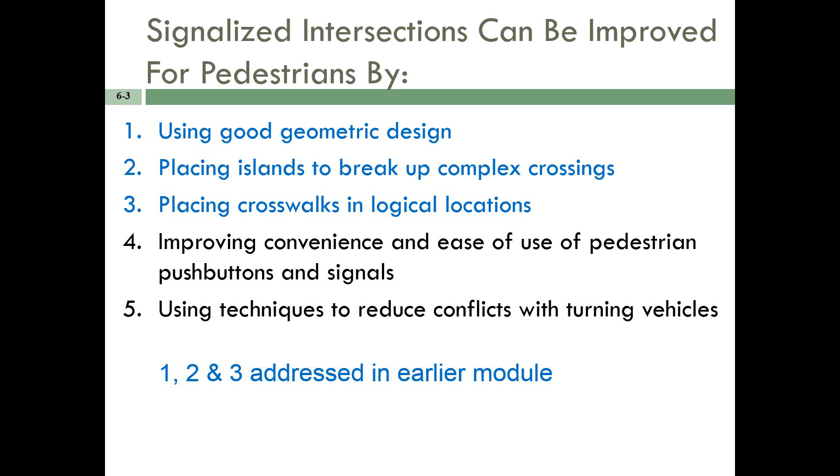And then we're also going to talk about proper push button location, and a little bit about when you automatically get the walk signal versus when you have to push the button to get it, and then also looking at ways to reduce conflicts with turning vehicles. But the first couple of these are things that we're not going to talk too much about today, but may have been discussed in other local agency Traffic Safety Academy webinars, or certainly in various Federal Highway webinars.

The first point that we're making here is that traffic signals assign the right of way. They regulate flow of traffic. And one thing that's interesting about this, and we would like our signal timing engineers to think more about, is that they create gaps in traffic, not just at the signalized intersection, but downstream of them. And so the way that we time and operate our traffic signals has an influence on safety at the traffic signal and on safety adjacent to the traffic signal.

And I'm not saying pedestrian safety, I'm saying overall traffic safety, because of course, while you have pedestrians trying to cross the street, you also have motor vehicle traffic that's maybe making left turns out of side streets or driveways, or doing other maneuvers like that. And so one of the things that we know is that a dense grid of signals that is operating, and let me define some terms. This is more of a professional audience, but let me define some terms that we're going to use throughout.

We have cycle length, which is the total time it takes for a signal to go through all of the phases. And then we also have phasing, which talks about the order in which the signal operates and what sort of arrows you get, left turn, right turn. And Anthony, my traffic engineer friend, is squinting as I explain these in layman's terms. And then we have the timing of the signal, the splits, how much time is given to each of the conflicting movements. So we're going to be using some of these terms throughout.

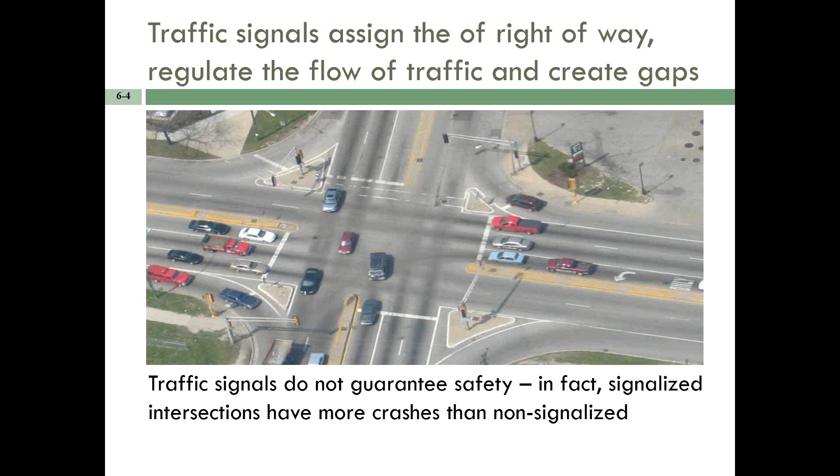We don't get into that too much in the slide, but I think that we need to think of traffic signals not as a point feature that only influences the signalized intersection, but as a systems feature that influences the way the entire arterial grid behaves. So with that, I'm going to move along.

Assuming, which is a big assumption, that everyone is obeying the traffic signals, so the pedestrians are only walking during the walk phase and motorists are not running the red light, or they're not making imprudent right turns on red. When we assume this, which is not really a safe assumption, the biggest conflicts are the turning movements.

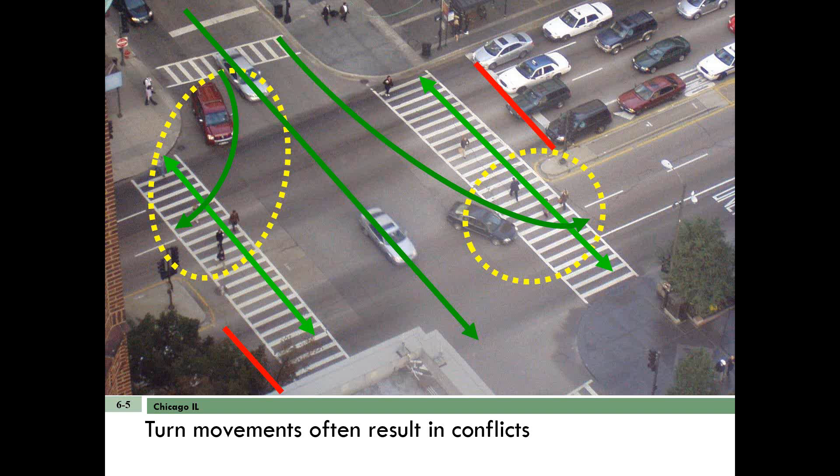And basically you have right turns and left turns. Of these two, the left turn movement is more deadly, more dangerous, results in higher severity of crashes. And that's simply a function of the left turn movement typically being a higher speed movement. It's a larger radius than the right turn movement, and frequently it's a function of a car trying to turn left and get out of the way of oncoming traffic, which makes them tend to want to go fast from a self-preservation standpoint.

Traffic signals don't ensure protection, and pedestrians pretty routinely ignore traffic signals. And sometimes, I'm not saying it's okay, but sometimes they can do it safely. Our office is in downtown Tampa. You can walk around downtown, and certain streets, you better make sure you've got the walk signal. But the lower speed, lower volume streets, oftentimes there's no cars for days in either direction, and you could scoot across as long as you're paying attention and probably be perfectly safe.

And so this is an issue that we deal with, and it's kind of tough sometimes for people to figure out when it's probably reasonably safe to ignore the traffic signal and when it's really probably a very dangerous thing to do. The other thing is that pedestrians are going to cross where it's convenient. Pedestrians and cyclists as well, but especially pedestrians' aversion to out-of-direction travel is very significant simply because they don't move very fast. That's the main reason. It takes a pedestrian a long time to go a couple hundred feet out of the way.

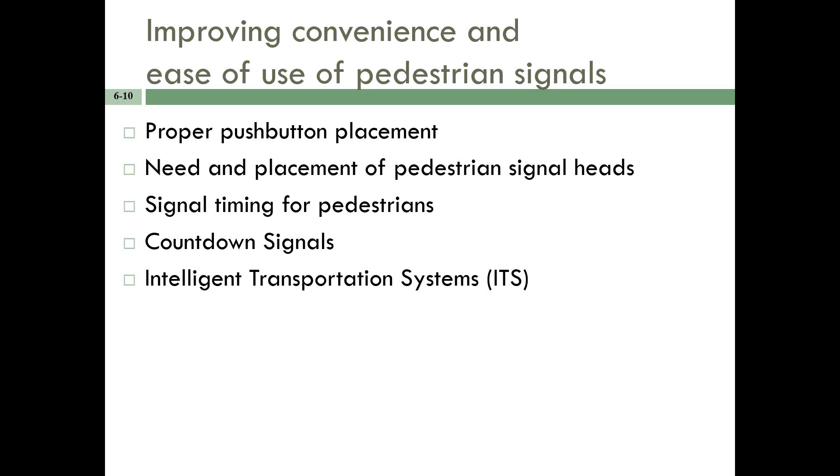So I mentioned before making the convenient thing the safe thing. So how do we make operating the traffic signal convenient? These are some things we can do: good push button placement, making that intuitive, thinking about placement of signal heads so that it's obvious what's going on, timing, countdown signals, and then opportunities to use technology to make the whole thing work a little bit better.

I would say that unless the signal has been built or rebuilt in the last maybe 7, 8, or 10 years, and in some cases even then, odds are that the push buttons are probably not compliant with MUTCD. And a lot of what the MUTCD is queuing off of is really the ADA.

But the idea is that they're in line with the crosswalk so that as you're walking towards the crosswalk, you could basically reach out and tap the button. They should be at least 10 feet apart. A lot of times we see them where they're both mounted on a signal pole, so that would not be appropriate. They should be between 1.5 and 6 feet from the curb, so not too close or not too far away from the curb. And the face of the button should be parallel to the crosswalk.

So again, physically, the orientation of the push button ought to explain what crosswalk it relates to, so that without signs or any other supplemental instruction, it's intuitive how the thing works.

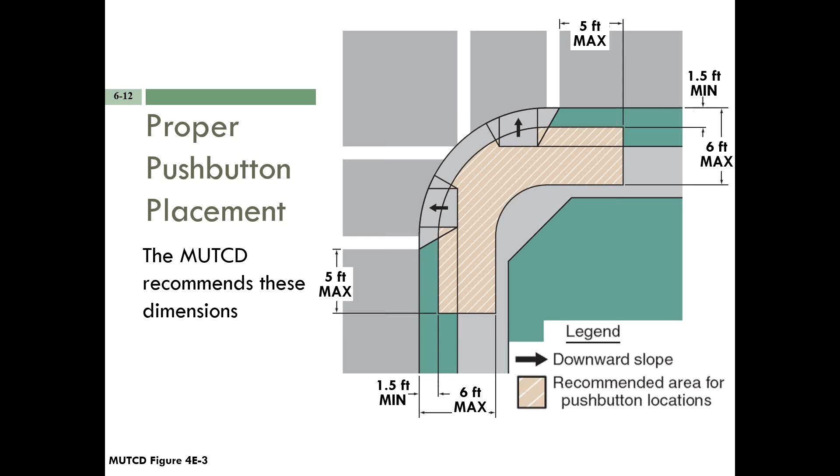And the idea is that place where you push the push button ought to also be the level landing where you wait to cross. And so we're trying to coordinate both the intuitiveness of the button placement and also the ADA requirements. There you go.

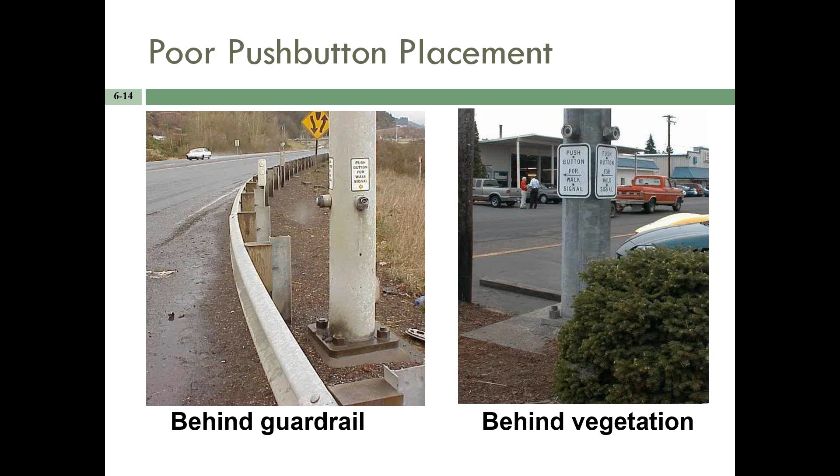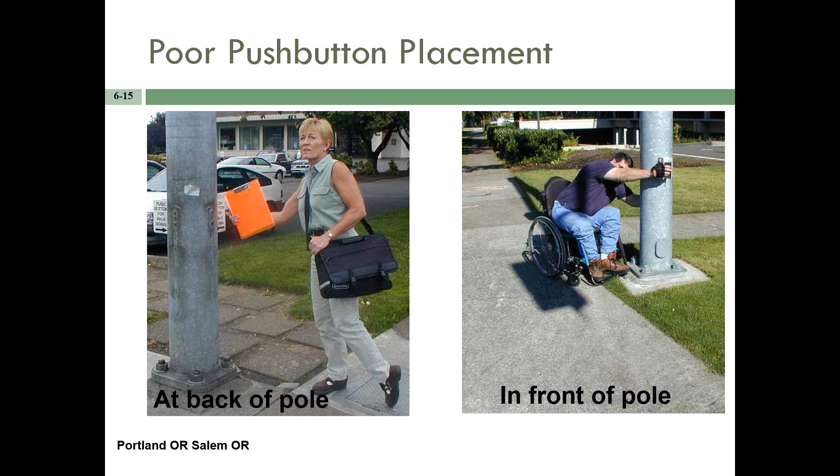When you go and press the crosswalk button, you press it and you pray or you think happy thoughts or whatever your tradition is. When you press the button in an elevator, it lights up and it lets you know, hey, gotcha, on the way. And so that's something that we think is a good adaptation for crosswalks, to at least provide that feedback that lets the pedestrian know, hey, got the message, we're working on it, you're going to get your walk signal.

I've often thought sometimes that people think that pedestrian push buttons are pneumatic because they'll push them about 1,000 times just to make sure, and that probably has a long-term maintenance wear and tear issue. So there may be even some maintenance advantages to providing that feedback, since maybe your push button doesn't get pushed 1,000 times a day. So it's kind of a common sense thing that let's make it work like an elevator.

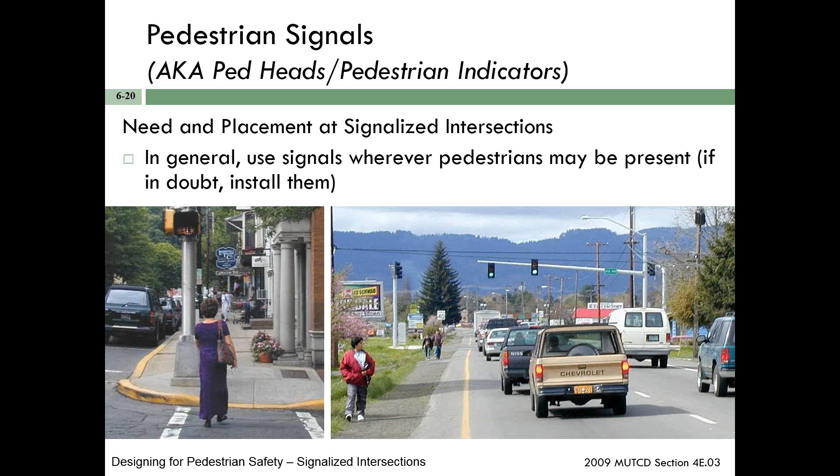So they'll put in the pedestrian signal heads, they'll put in the push buttons, and they'll put in the ADA ramps, just waiting for somebody in the future to show up with a sidewalk, so that at least that basic infrastructure is in there. But that didn't used to be the case, and so there may be some legacy locations that don't have the features. But the preference is that if we have a traffic signal, we have a pedestrian signal head.

Where they don't exist, most pedestrians will figure out to go with the regular signal head and then cross with that concurrent green. But this doesn't always work out. This could be especially a problem on a one-way street where you can't see the signal head. And just some locations where maybe there's left turn phasing or something like that, it may not be the same right of way as for the motor vehicles.

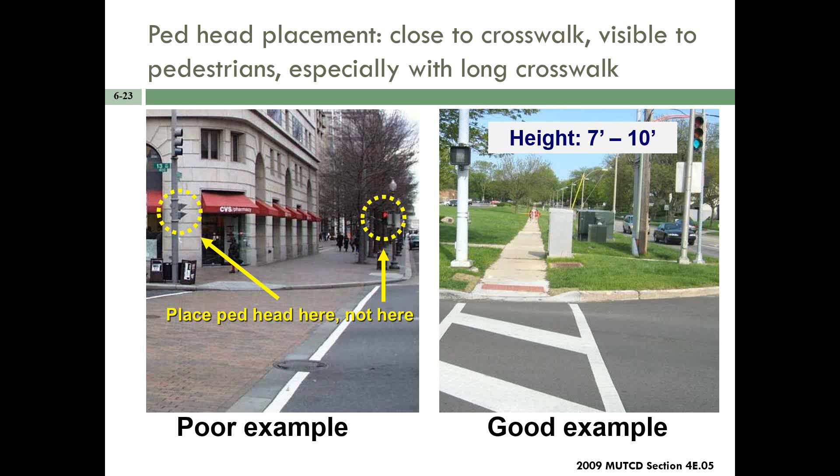Pedestrian signal head placement is important, 7 to 10 feet high, and you really want to place them close to the curb ramp, where they're not so far away, where they're intuitive. And then it's really important that they're more or less in line with the crosswalk. I'm going to make a little bit of fun of the city of Tampa, because I know that a couple of their staff at least are on the field right now and they won't hear me.

But when Zack Street, Avenue of the Arts, was redone, which is a beautiful street, the pedestrian ramps and crosswalks were shifted inward because curb extensions, more commonly bulb outs, were installed as part of that project. By all extents and purposes, that was a wonderful project for pedestrians and a nice downtown streetscaping project. But when those crosswalks were shifted inward, I noticed that the pedestrian signals at some locations were not also shifted.

So you're walking along this wonderful sidewalk, and then you come to the crosswalk, and it's not really obvious to you where the signal head is, and you may believe maybe that it's an unsignalized location and just kind of wander out into it. So this is an example of making sure that they're lined up.

We don't have many or possibly any two-stage pedestrian crossings in the Tampa Bay area. They do exist throughout the country, and frankly, they're a pretty good idea when you have big, complicated intersections. We could probably stand to think about that more, but particularly when you have a two-stage crossing, it's really important that the pedestrian signal heads are offset and aimed, and can even be louvered or using LEDs to make them a little bit directional, so that pedestrians don't cue off the wrong signal head in a two-stage crossing.

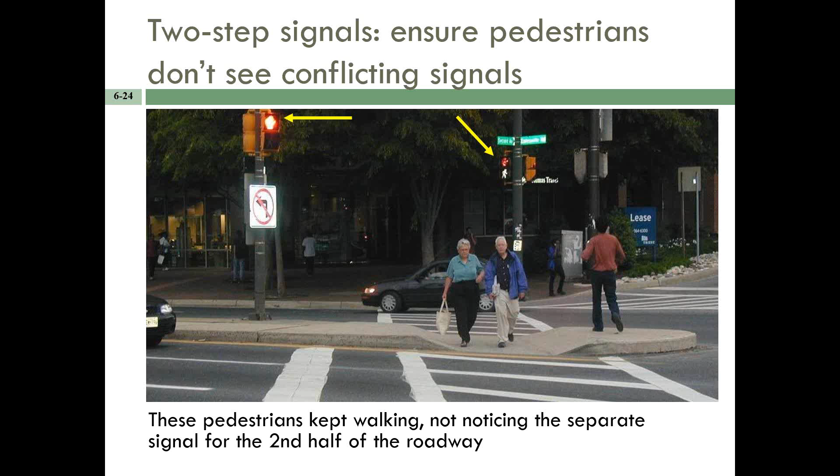Accessible pedestrian signals, something that we primarily think about for pedestrians with visual impairment, but we expect that in the next edition of the MUTCD, these will become the new standard, similar to the way that the countdown pedestrian signals have become the new standard. So as we do new installations or capital maintenance, the requirement will become to either install or retrofit to these.

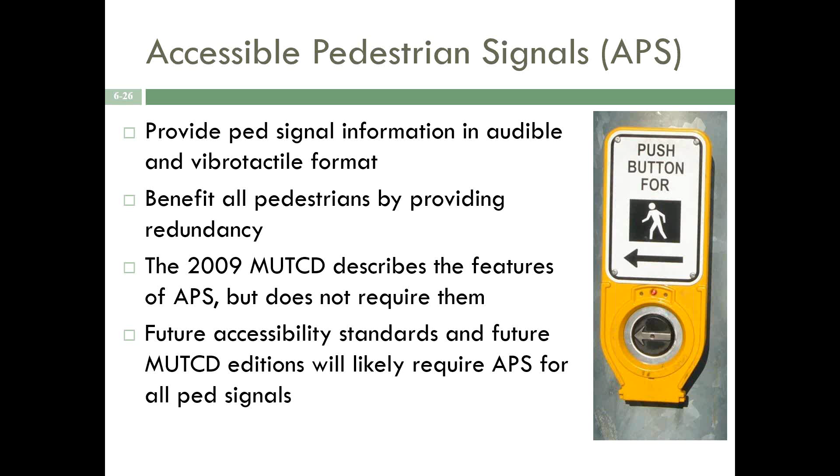What they do is they provide an audible and a vibrotactile message to the pedestrians, and they really do provide some redundancy for all pedestrians, not just pedestrians with visual impairments, and that's why it's going to the overall thing. The speakers are at the push button, and there's two basic components to this. There's a locator tone, which helps someone locate the push button. And that sounds, if you have sound on, a little bit like this. It's kind of a low beep.

The tactile arrow, the raised arrow, explains the direction that the pedestrian push button controls the crossing for. And these things will have an automatic volume adjustment. So think of a noise canceling headphone. They have a microphone that's listening to ambient noise, and then they're adjusting the volume of the locator tone so that it's audible within about 6 to 12 feet of the button.

So someone that's visually impaired will use the guide dog or their normal process with cane or whatever to follow the sidewalk to the intersection. And then from that point forward, the locator tone will help guide them in to the push button. And that's so that it doesn't become a noise pollution factor, maybe for businesses or residents in the vicinity. If you can imagine 24/7 beeping that you can hear from your front porch, that'd be pretty annoying.

But the location, of course, then is critical to the proper functioning. If we've not done the push button location things that we talked about before, then none of this really matters. And so that's why if you have to retrofit to an accessible pedestrian signal, but your pedestrian push buttons are not accessible, or they're in a poor location to begin with, now you're not sending somebody out to swap out a little box and a button. You're going to do a much bigger project.

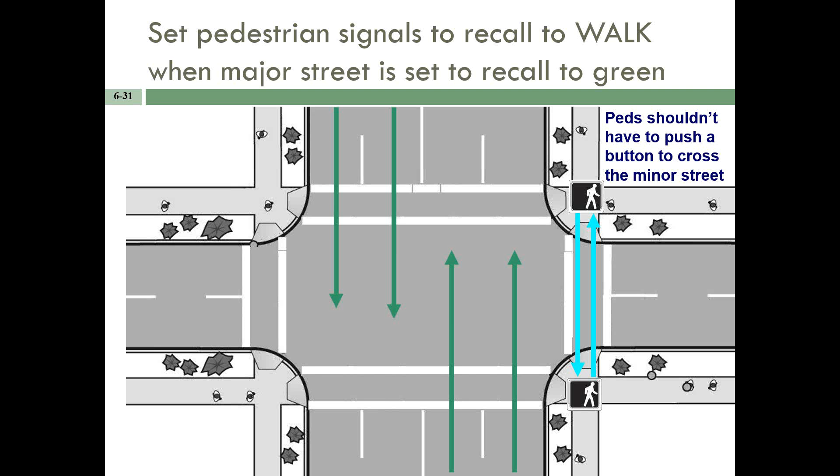The other thing we could talk about also is how our signals operate peak versus off-peak time period. So there may be a very, very valid case where you don't want to call the walk signal for the minor street automatically during peak traffic, but maybe late at night, early in the morning, maybe it doesn't matter as much. I'm not saying that's a good idea necessarily, but doing everything always the same way and not being responsive to conditions or time of day doesn't always get us the best outcomes.

Thinking about timing and walking speeds, shorter cycle lengths are better. Unfortunately, I've heard that in some cases, the absurd duration of our 4-minute cycle lengths are being driven by the fact that the minimum pedestrian intervals are so long, particularly when we have those 2 major roads. I don't know if I fully buy that or not. I'll have to go look at some timing plans and see if that's BS or not.

But as a rule, everyone's compliance goes up when there's less wait time. One of the issues we're going to have with long cycle lengths, not so much a problem in most of suburban Florida, but maybe in downtown areas, is that pedestrians tend to pile up when you have a long wait. And so then that can cause crowding. This is a national presentation. I don't see this being too big of an issue in Florida because we have less pedestrian volume, but in a downtown, this may be something to consider.

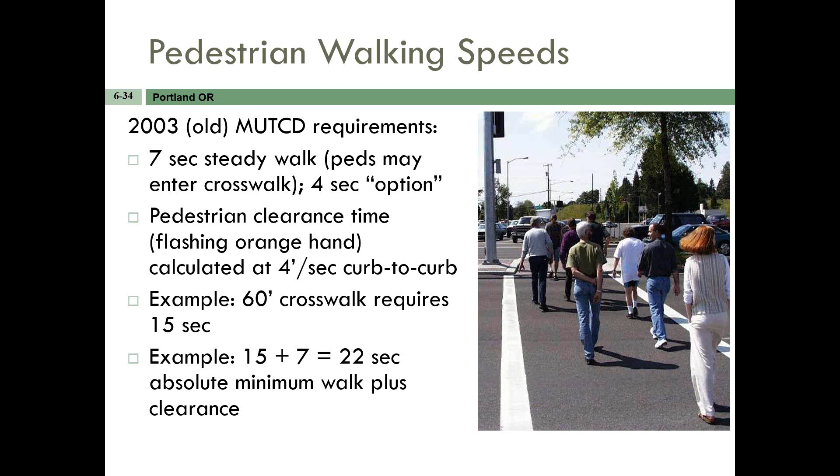Since the 2003 to the 2009 MUTCD, there's been some changes. Let's skip the old requirements because it's been a long time since 2003 and just talk about the new requirements. There's a minimum of a 7-second walk. The pedestrian clearance should now be calculated at 3.5 feet per second, curb to curb.

And so the way this comes out is if the crosswalk is 60 feet, think about it, that's a 4-lane road with a 2-way left turn lane, basically. That's a 60-foot road. So the crosswalk, 60 divided by 3.5, you round up as 17 seconds, plus 7 is a 24-second total. So 7 seconds of walk, and then you'd have a 17-second countdown. But you do an additional test for the walk plus the clearance time, and that's calculated from the push buttons.

So it's 6 feet from the curb if no button to the curb. What does this say? 6 feet from the curb if no button to curb on other side at 3 seconds. Anyway, basically you add 6 feet. And so it's 6 feet plus 60 is 66, divided by 3 is 22, and then you take the greater of the two numbers. And so the alternate test is really maybe more for smaller intersections, basically is what that comes down to. But that's how it's calculated.

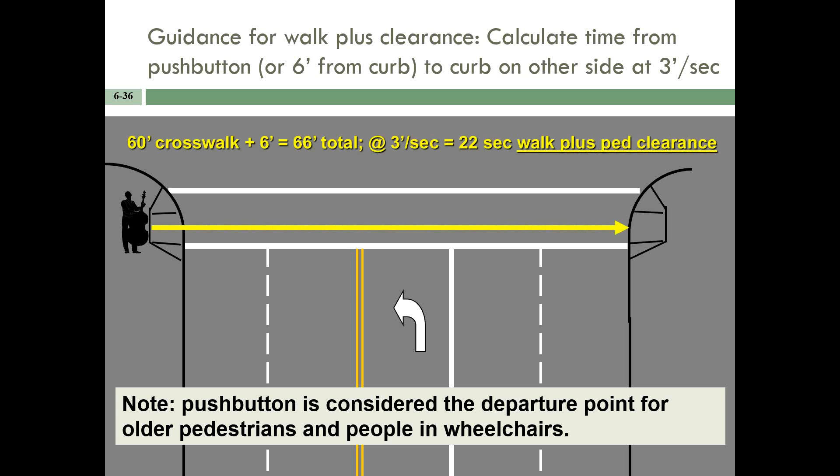And I think the main thing to point out here is that the average American pedestrian has gotten a little bit slower. It used to be 4 feet per second, now it's 3.5 feet per second. Again, mentioning that the push button is considered to be the departure point. And so that's where you get that sort of alternative test. So it's the 6 feet plus to the other curb for your minimum. And usually I think in Florida where our streets tend to be wider, it's going to be the first one, the 7 plus width divided by 3.5.

Used to be we had walk, flashing don't walk, and then a solid don't walk. And most people didn't understand it. I would like to give credit to Florida DOT District 7. Over a decade ago, they were willing to have an unmarked utility truck back up to your local maintenance yard and unload a pallet of countdown pedestrian inserts for local maintenance forces to install. And so I can go down to Fort Lauderdale, where I'm going to be tomorrow, and in their downtown, they won't have countdown pedestrian signals. Although they are aggressively implementing Vision Zero, so I expect that they will have those everywhere very soon. But in Tampa Bay, we've enjoyed the luxury of those for over a decade now.

However, that is a new standard; DOT has adopted that as a standard. So as DOT does maintenance, and really as everyone is doing maintenance, we ought to be updating to these things. The main thing was that the more information you provide to people, the better decisions they can make, and the flashing don't walk simply didn't tell you how much time you had to get across. So with the new system, which was new when these PowerPoints were made but is not new anymore, you know exactly how much time you have.

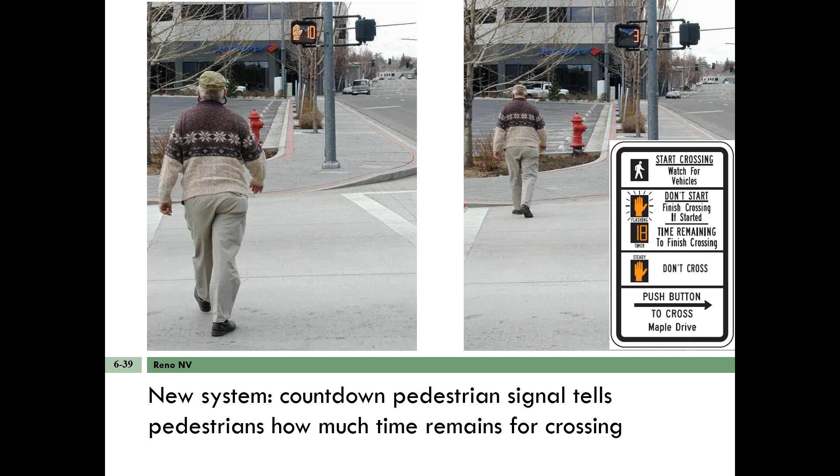Now, if you begin crossing after the countdown starts, technically you could be cited. I've met a lot of different police officers, and I've not really met anyone that's likely to cite you unless you just completely impede traffic as you go across. If you are someone that doesn't move as fast, you know that you need that full countdown period to get across the intersection. If you're willing to kind of run for it at the end, you might be able to look at an intersection like this, have 6 or 7 seconds left, and easily jog across and still make it before you create a conflict. And so providing that feedback is really critical to people making good decisions.

These have been out there, as I said, for over a decade, so we've had time to study them. They're intuitive for pedestrians. What we find is that more people start crossing during the countdown. So, technically more people are breaking the law. But what we care about really is the outcome, and that's that fewer people start walking late in the clearance phase, and very few people are walking when the don't walk has come on, so you're at the yellow and then red for the drivers. And the other thing that we found is that they have an overall crash reduction benefit on the intersection, not just for pedestrians and cyclists, but for motor vehicles. Drivers use these to say, you know what, I'm just not going to make that one. Even from a distance, you may not be able to read the actual numbers, but you can usually tell if it's down to single digits.

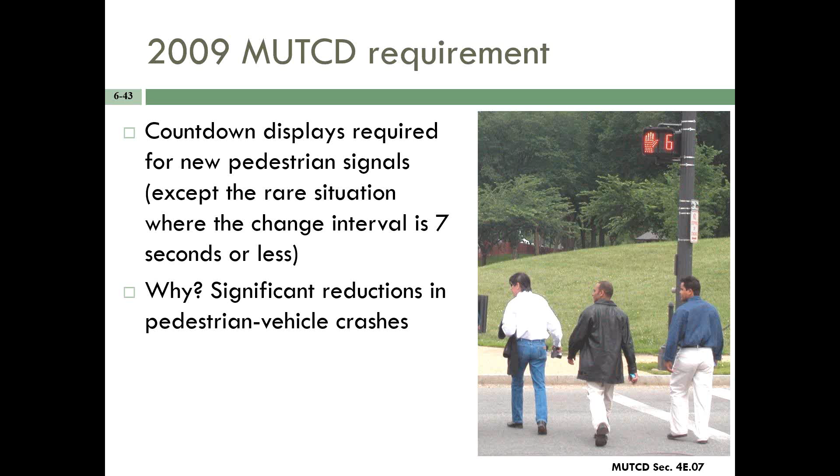So new requirement, overall good benefit. We've had a little discussion here already, and we can bring it back at the end. One of the things we want to talk about is using technology to sort of optimize what we're doing. We use 3.5 feet per second as sort of that.

It's sort of not really the straight mean of pedestrian walking speeds, but kind of that first standard deviation. So we're accommodating maybe 85% of the walking public with that 3.5 foot per second standard for our timing. But then that means that there's maybe 7, 8, 10, 15% that are slower than that. If we take all of our signals and say, well, we've got maybe a little bit older demographic, whatever it is, let's go with 3 feet per second.

Now every cycle length, we're taking that hit. We're extending our overall cycle lengths, which have negative effects I've already talked about. So it's not something you necessarily want to deal with the outliers on every single phase. So what we can do is we can use whether it's video detection or infrared to basically understand that I had a pedestrian call. And again, this is probably going to be something that's more on that minor movement walk interval where we really are sensitive to how much time we're taking away from the arterial.

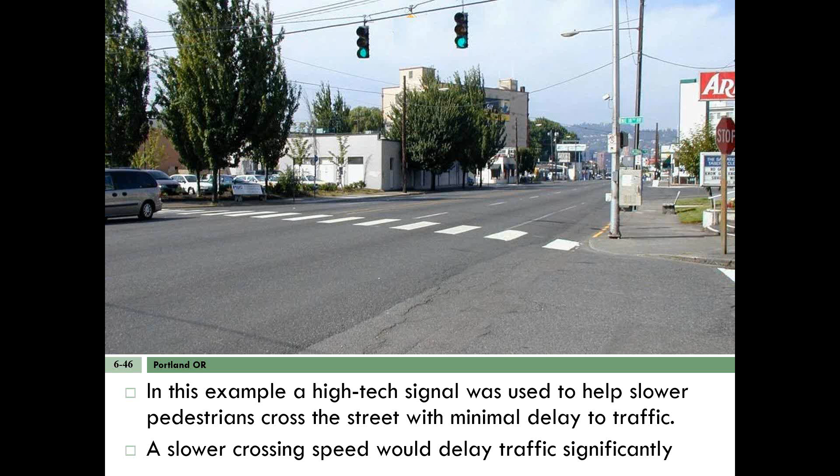So I've got a pedestrian call. I know that somebody's going to want to be trying to cross, and we can use our technology to track that person as they come across the crosswalk. And so the idea here is that they're watching the crosswalk, they're tracking the pedestrian, and they can extend that walk interval a little bit. So you time it to the standard timing, but if you have that outlier pedestrian, that 5-10% of your people coming across, then you can give them more time.

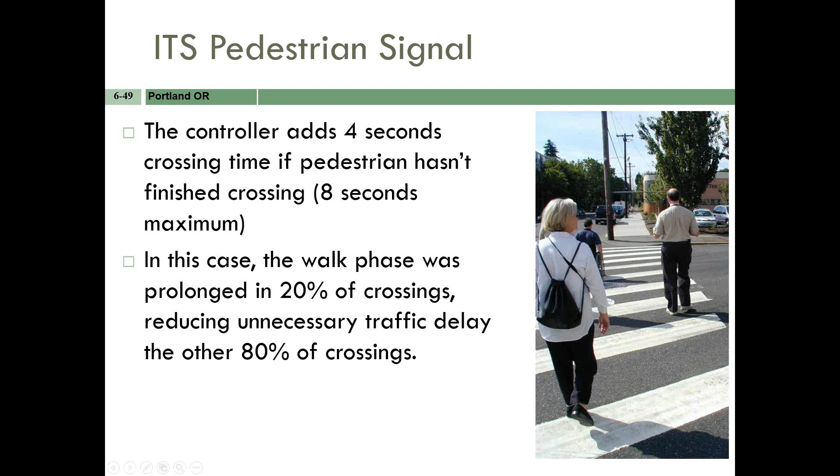Basically, you add a 4-second block. If they haven't finished, then you can maybe do another 4 seconds. And for those of you that deal with signal timing, you can think of it as sort of dilemma zone preemption in reverse. Eventually, it times out. But what we found here is that the walk phase was prolonged. This was a Portland study. About 20% of the time, it needed to give the pedestrians a little bit more time. But there was therefore an 80% reduction in the delay for motor vehicles compared to if you had just always used a longer interval. So that's something to consider.

And again, that may be situational. You can analyze your demographics. Maybe you've got hospitals nearby. I know some locations in Tampa where we've got housing that's specifically for the elderly. It could be different reasons. It's sort of like the no right turn on red, the leading pedestrian interval. It's one of those things that's more of a case-by-case thing that you do, but it definitely has benefits.

Looking at turning movements, nationally what we find is that the left turn is 2 to 1. And I think there may be crashes or incidents with the right turning vehicle, or maybe the pedestrian gets brushed by the car or even knocked down. They're not injured, and I've seen people go around and say only half of motor vehicle crashes have injury, but 95% of pedestrian crashes have injury. Well, no, it's not necessarily true. You just don't report them if you're not hurt.

There's no damage to the car. If the pedestrian's not damaged, it's not a crash as far as we know. It's just two people yelled at each other a little bit, and one of them went home mad and maybe a little bruised. So I'm not necessarily saying it, but maybe right turn conflicts are at least as common as left turn, but they're less likely to result in a reportable crash or less likely to result in an injury.

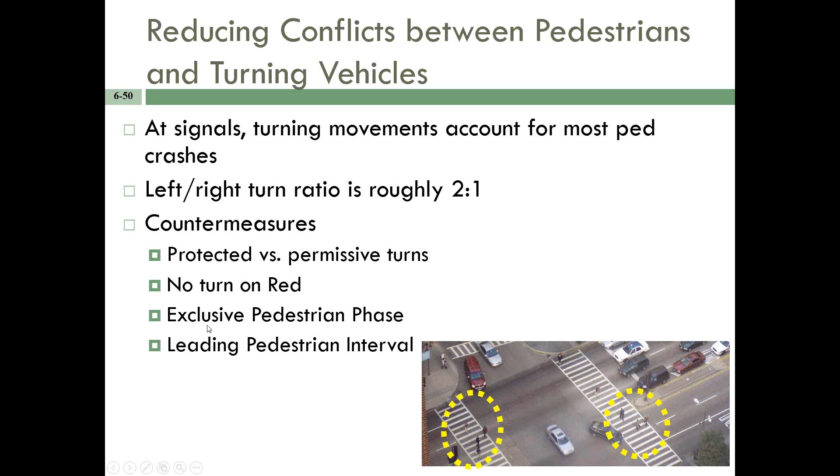There are opportunities where exclusive pedestrian phases make sense, and we'll talk about that a little bit, and then leading pedestrian interval, and we've actually got a couple here in the region. We can talk about that. One thing we've done is at locations where we know that along the corridor we have sort of an elevated crash history, is we'll just remind people of their obligation to yield to pedestrians.

That's the R10-15 sign, and mostly you see these to remind people to yield to pedestrians when they're turning right, but you can also use these in a left turn situation. And again, we've gone more to the pictogram than to all the words. You can use an LED if you're real serious, but that costs a lot more. And these can be mounted on the overhead if it's a newer signal and you feel good about the structure, but more often you see them mounted on a sign pole at the side of the road there.

Protected versus permissive left turn. Protected left turns reduce all crashes, reduce left turning crashes and then also pedestrian crashes. This is what we're talking about, a permissive turn: green, cars go, the pedestrian starts, and then the left turning traffic goes. When we show this little illustration, we show it with the pedestrian crossing from the same direction of the car, because that's more dangerous. If the pedestrian is here and is crossing, odds are that this driver is at least aware that they exist. And as they start their turn, they'll see the pedestrian crossing.

In fact, odds are that by the time they get a gap from traffic, if this pedestrian was going the other way, they may already be through the receiving lanes for a left turn. So really the threat is when it's the same direction. And what we see is that this driver, not because they're a bad person, but simply because they are a human, is concerned about the threat to them. What's like me, what's the same size, what's dangerous to me, and that's motor vehicle traffic approaching from this direction. They are obligated to yield to this pedestrian, but may not even be aware that they exist in the first place because they're fixated on this cone of vision, looking for a gap.

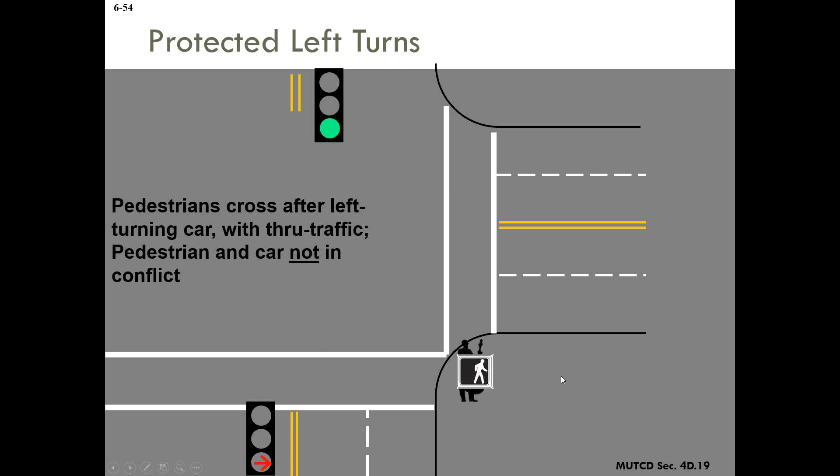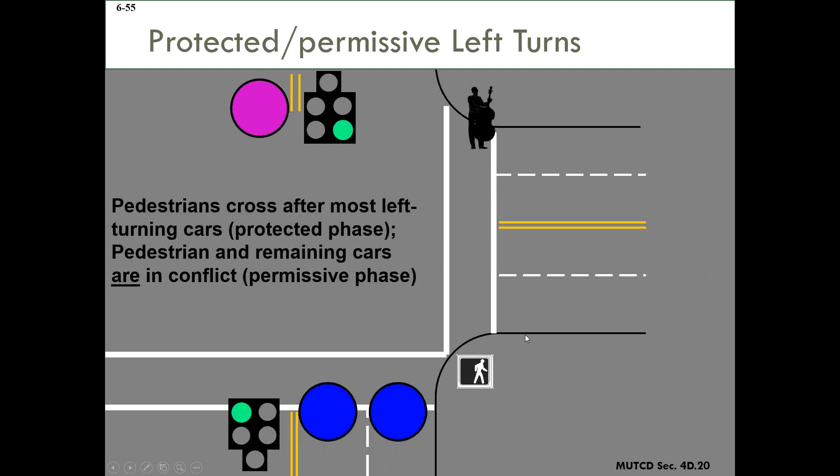The other thing I'll mention is that protected permissive is better for traffic because you let the drivers go through, but really still presents, I'm jumping the gun here with a slide. These guys go, but then you're back to the same old threat as what you have here. A solution we have that we've implemented awkwardly, I guess, or maybe only partially implemented in most of Florida, is the 4-section left turn signal. This has got the flashing yellow arrow, and more and more of these are becoming common.

What's a little frustrating for me is that the design philosophy of these nationally had two elements. One was that some people did research that said that a flashing yellow arrow sends a clearer message that it's a left turn, but you have to yield, than does the green ball from a 5-section signal head. So one part of it was a feeling that a flashing yellow was more intuitive than the 5-section heads that we were all used to. I'm not even sure if I buy that argument, because even if you took a space alien and landed him in and said which one makes more sense, the flashing yellow would make more sense. But then again, we were all used to the other thing.

And so we use them for that. We put them in new signals because it's thought to be a clear message that this is a permissive left turn. You can turn left if you yield. But the other big thing that they're supposed to be for is that they can be conditional. There are intersections where during the middle of the day, during the evening, early morning, late at night, whatever, it's perfectly safe to make a left turn on a permissive movement where oncoming traffic has the green.

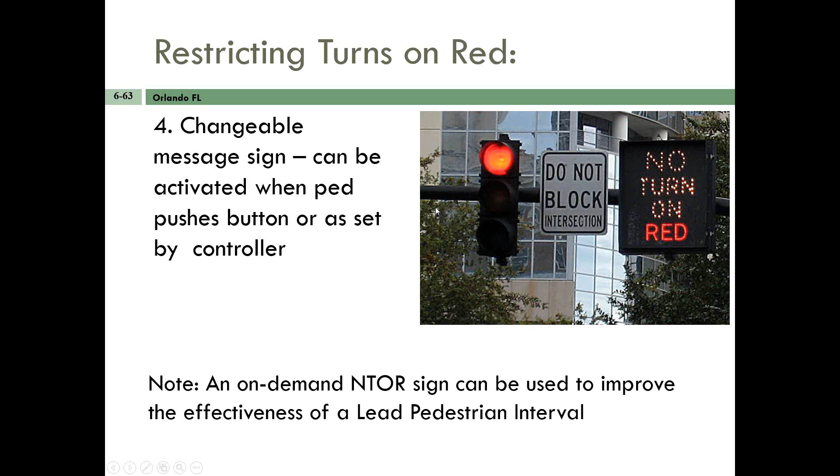They can be by time of day. A real good time of day case is school zones, as an example where you might do that, or it could be when the office is disgorging all of its people to walk across the street to the parking lot, or whatever, conditional. It can be actuated with LED. This is a little bit more expensive, and then you start getting into what's the wind loading on the structure. It may become a pretty expensive project.

We have an exclusive pedestrian phase. This is a pretty unique thing. Typically, you would do this in a downtown area where you have very high pedestrian volumes. And what you're really doing here is you're eliminating all pedestrian vehicle conflicts. So the pedestrians can go east, west, north, south, and also diagonally. No traffic can go, no turns on red. And then you have your movements for your motor vehicles. So there's pros and cons to this.

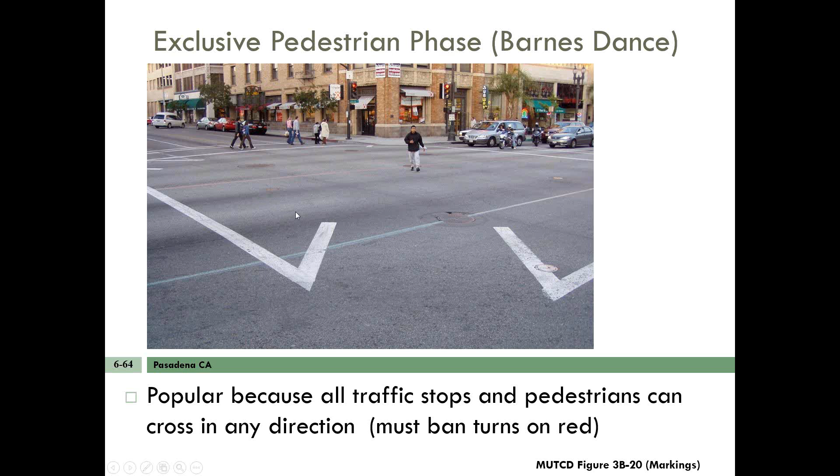This is something you would see when you have serious pedestrian crossing volumes, creating real conflicts and delays with the motor vehicle volume because none of the turning traffic can go because there's always pedestrians in that crosswalk. And so then you just give up and you say, you know what, pedestrians go, cars go, two separate times. Again, most likely to find this in a downtown, maybe a university campus, very, very high volume locations. Pedestrians have to wait for both motor vehicle phases to go, but then again, they can cross diagonally, which can be an advantage.

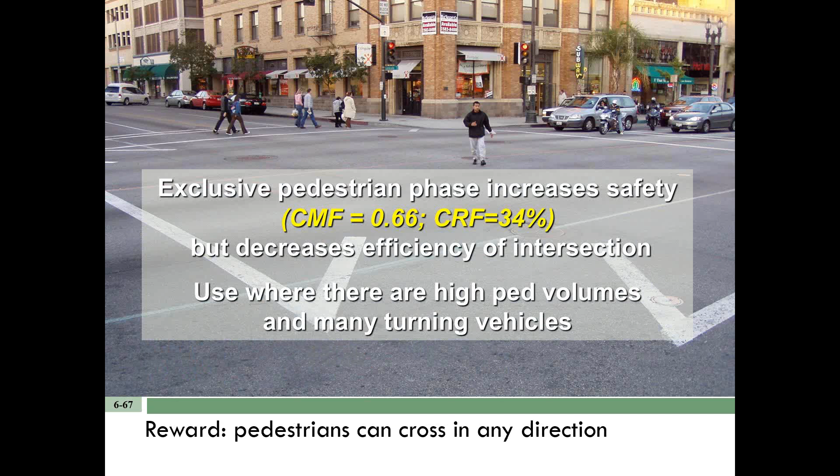We kind of skip through these though. And obviously, when you eliminate all of your turning conflicts, you get a good crash reduction when you do that. Leading pedestrian interval, there may be more. The one I know about is in downtown Tampa on Ashley at Kennedy going across the bridge. These are things typically you find when you have a very, very heavy right turning volume. And what it does is you'll have a condition where you've got right turn on red, and then at that location, it's a two-way street into a one-way street. And so you have a left turn movement; you basically have drivers that are making an eastbound left turn.

And so it's a very, very easy right turn on red movement there because that eastbound left is really a major phase. So the drivers are making right turn on red, they're getting used to it. And then the southbound goes green and the drivers just keep turning right and the pedestrians never get a chance to go. And so this is basically like a miniature exclusive phase for the pedestrians.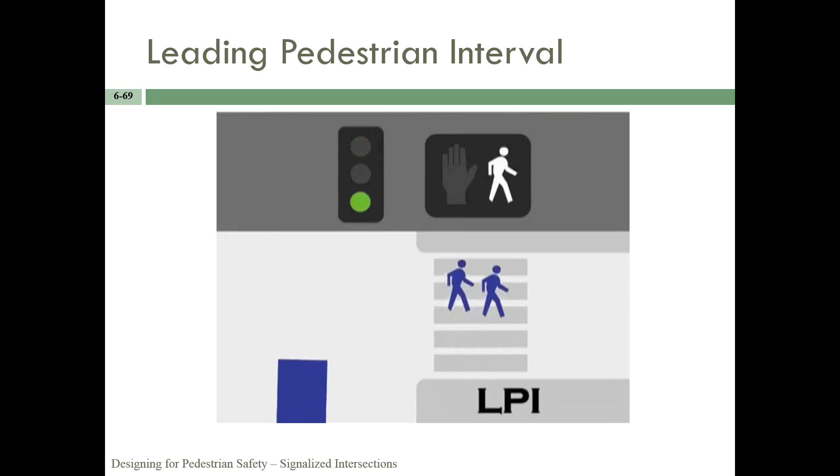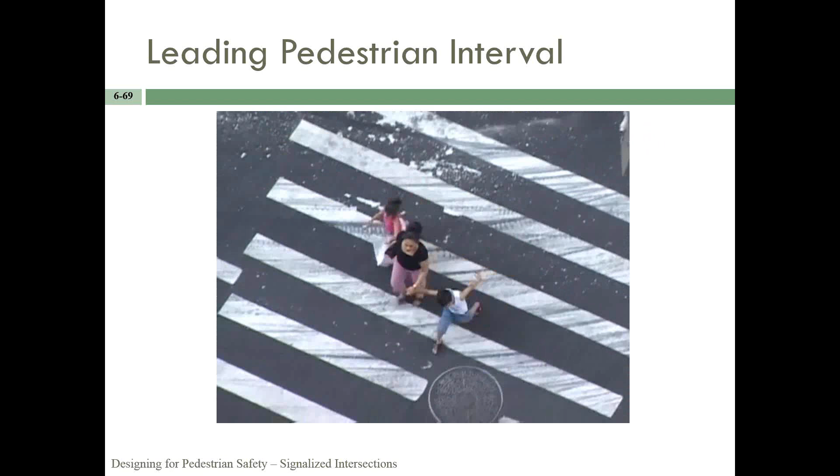The pedestrian gets a walk sign, and they're able to enter the crosswalk, and then the cars get the green light. So the pedestrians at that point are well established in the crosswalk. Now you notice the traffic is completely stopped as the walk sign goes on. So the pedestrians start first as the traffic stays still, like this lady crossing here, and they won't move for a whole 17 seconds. All right, I'm going to stop there.

17 seconds, that's New York City coming off of a major bridge. The ones we'd have would typically be 5 seconds or so. And so it's a different thing. It's basically 3 seconds, 5 seconds. It's not a major deal.

And it's basically the same phasing plan, by the way, as the bus queue jump, which if we ever get bus rapid transit for real, then you could see, well, I think Central Avenue maybe, we'll see what they do over there when they put the BRT in on Central Avenue in St. Pete. But the idea is that at the same time you're giving the bus a jump, you're giving those pedestrians a jump too. Those typically are going to go together, lots of bus passengers, lots of pedestrians.

And you can pull that 3 to 5 seconds off of whatever movement it makes sense to pull it off of. Typically it comes from a minor movement. So this just shows you again how that works. So there you go.

If you do a leading pedestrian interval, you must do an accessible pedestrian signal, because the way visually impaired pedestrians know that they've got the walk, if there is no accessible signal, is that they're listening to the parallel traffic start moving. So they're listening to the cars, and they know therefore that they ought to be able to go if there is no accessible pedestrian signal.

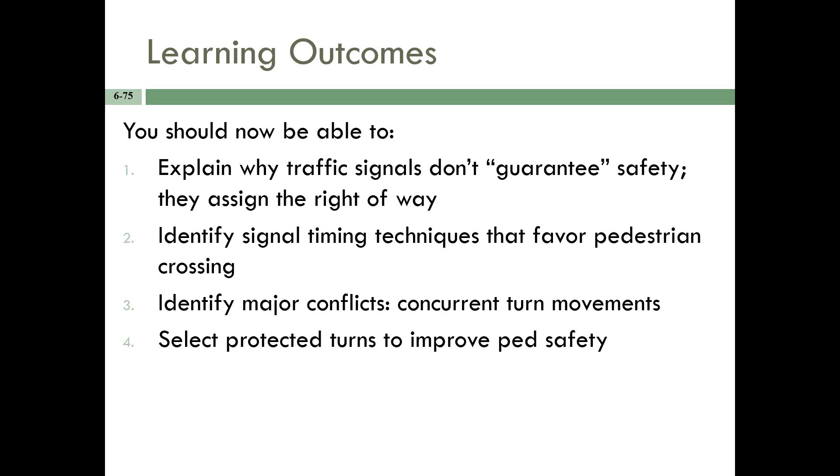There was one more follow-up on the Florida statute saying, read the statute. It specifies at signal-controlled intersections. And I think we understand that the Florida statute is to stop for pedestrians in crosswalks. But in the MUTCD for that sign, the R10-15, turning vehicles yield to pedestrians, there is no option for that sign. There isn't like an R10-15A where it's stop for pedestrians in crosswalk.

It's intended as a supplement to remind drivers that are making a right turn to yield to the pedestrians, and by statute they have to yield by stopping to them. If not, they run them over. I'm not sure what else to say about that, other than that's just a sign that is in the MUTCD that allows us to remind drivers that there may be a pedestrian there.

Yeah, and I don't know. I would think that if it said stop for pedestrians in crosswalk, and then you've got a green signal, you get the turn arrow, it sends a lot of messages. Regardless, the MUTCD is not carved in stone. Maybe in the next iteration they'll show the option. I think that the net effect is the same, and frankly, people ought to be doing it anyway. This is something that you're just reinforcing or reminding what they ought to be doing.